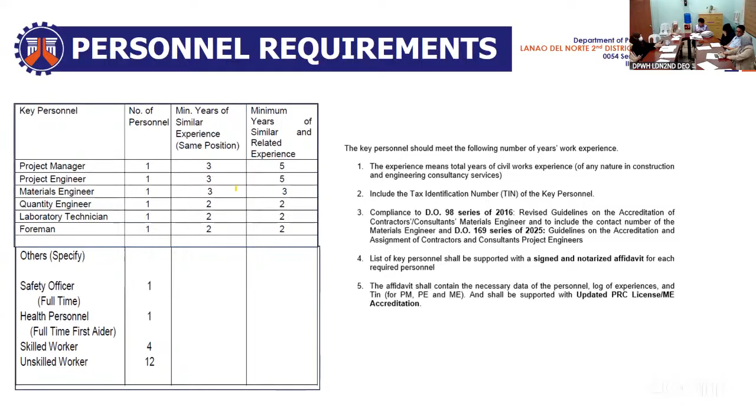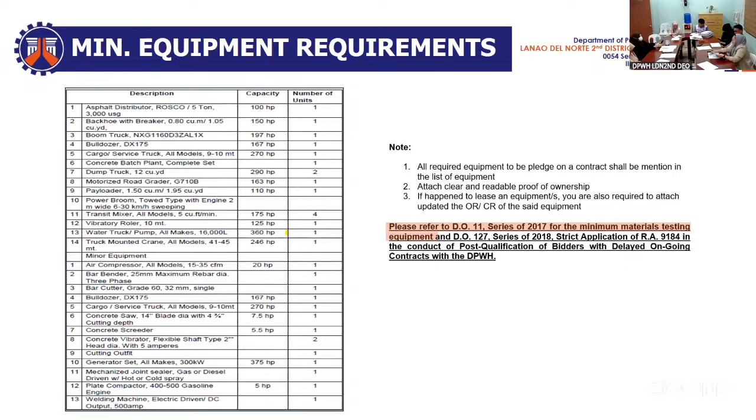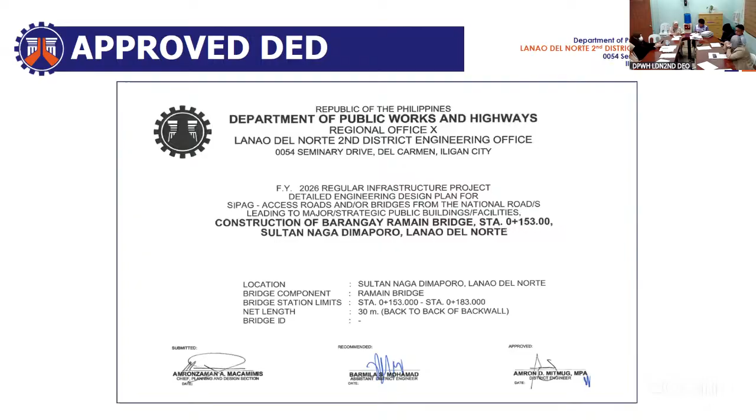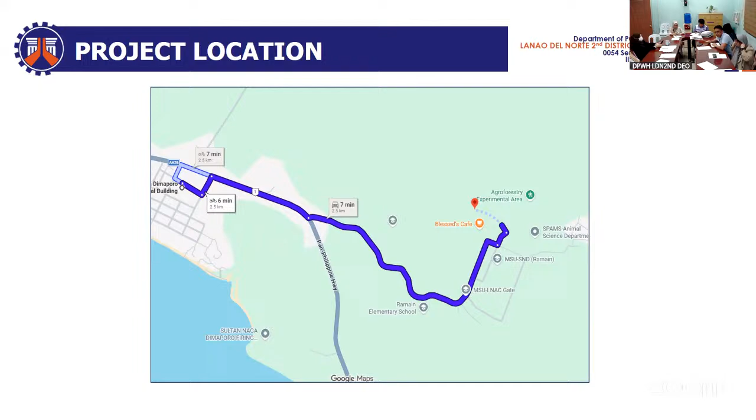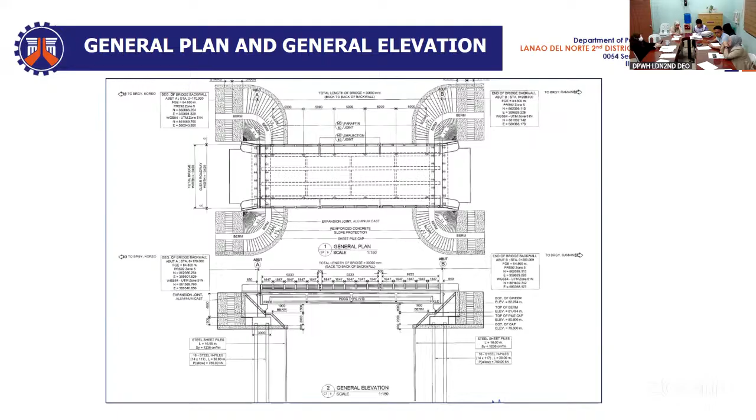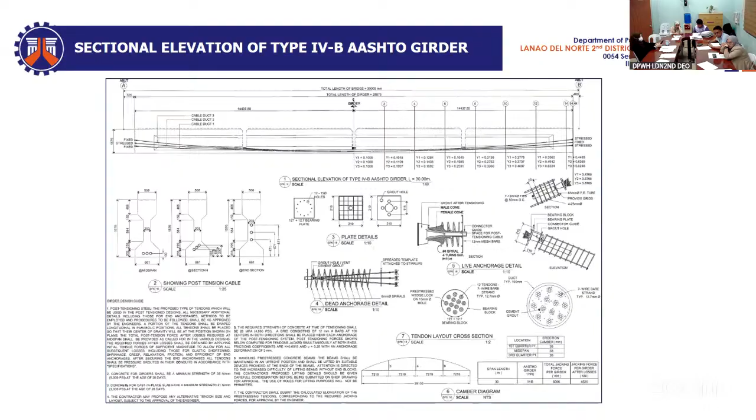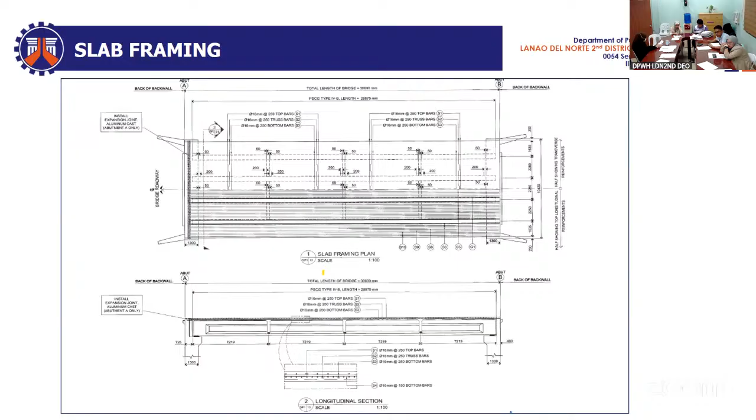Shown also is the general plan and general elevation, the sectional elevation of type IV-B AASHTO girder, the abutment details, slab framing, the foundation plan, and the slope protection details.

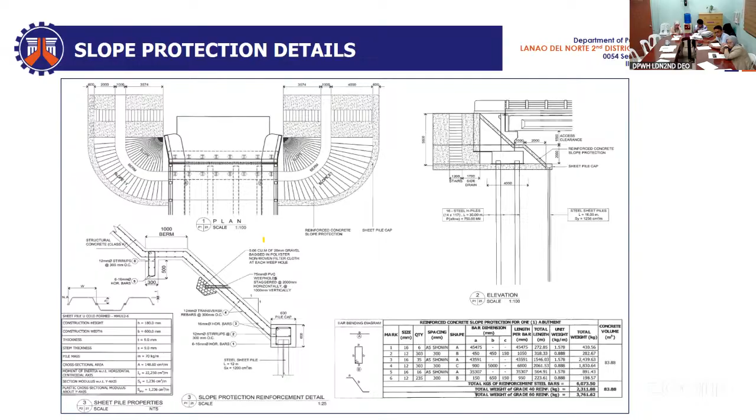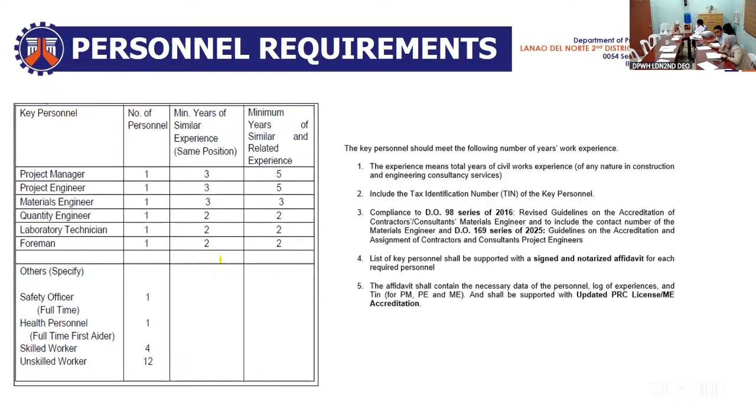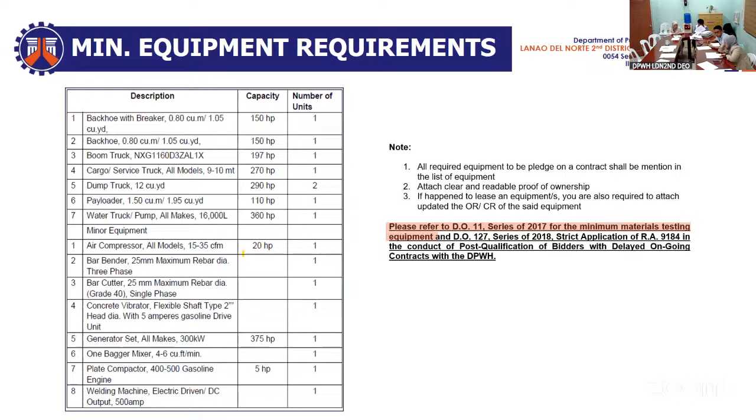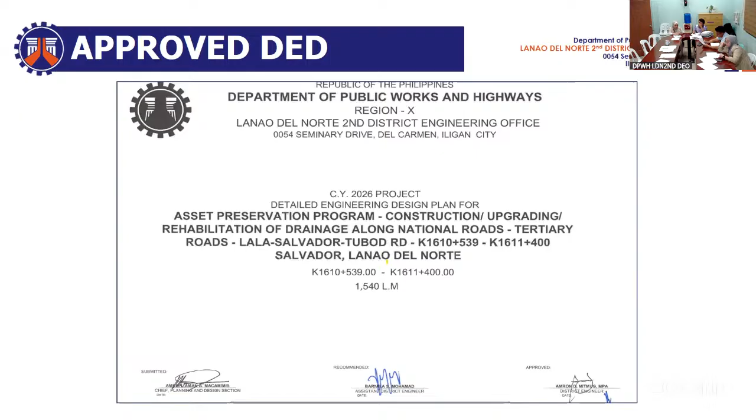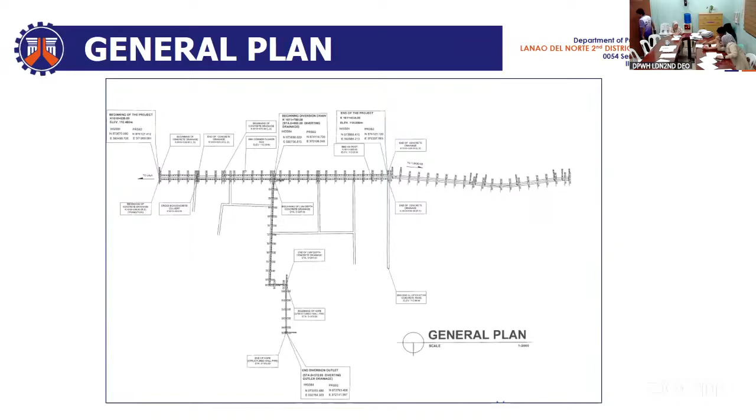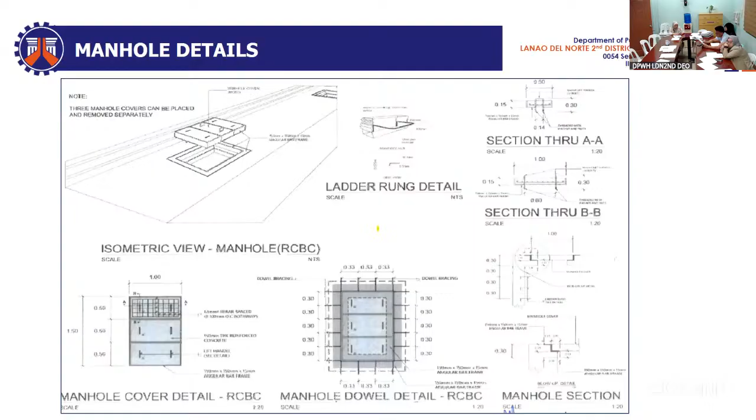Shown also is the bill of quantities of the project, the general plan, the line canal details, the manhole details, and the drainage steel grating details.

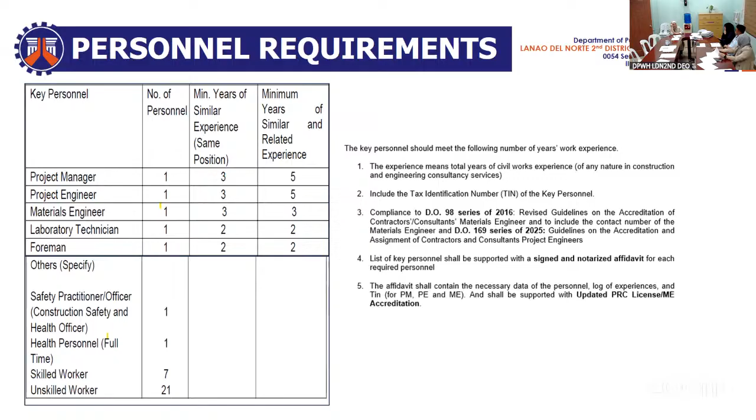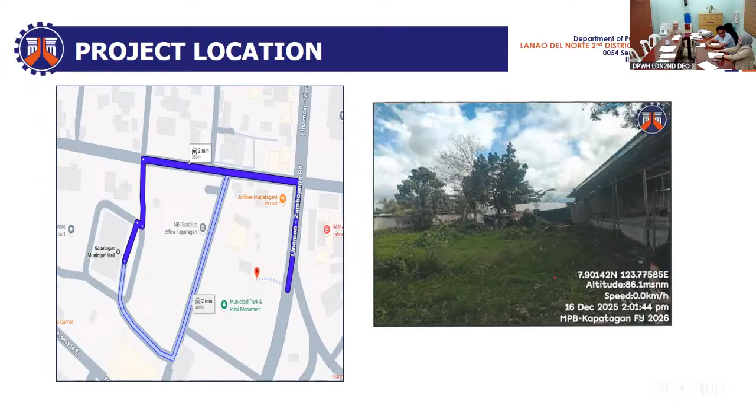Shown is the project location, which is from Kapatagan Municipal Hall. It would take a 2-minute ride from the site, which is approximately 400 meters. Shown also is the bill of quantities of the project.

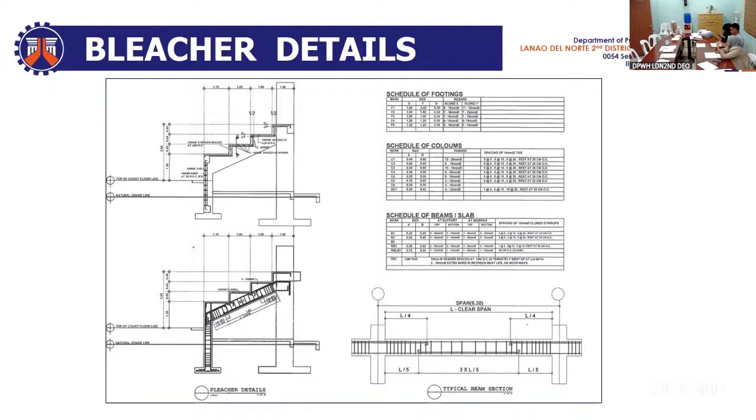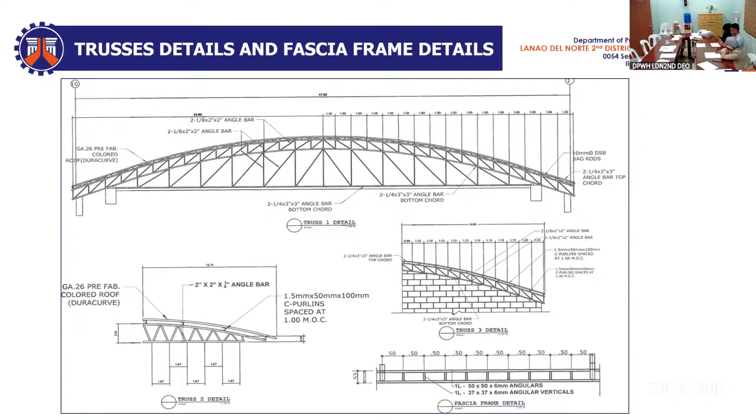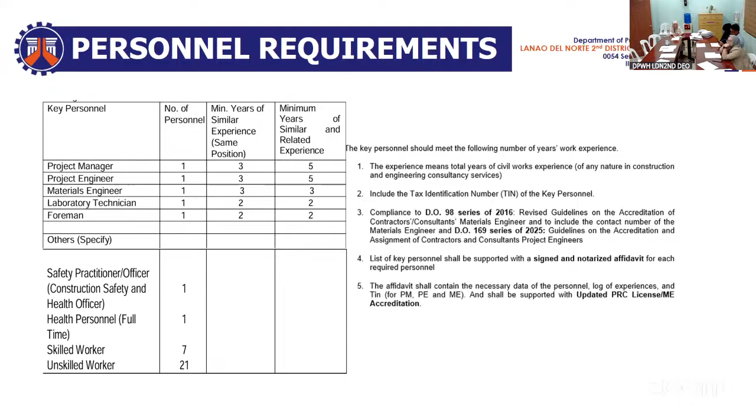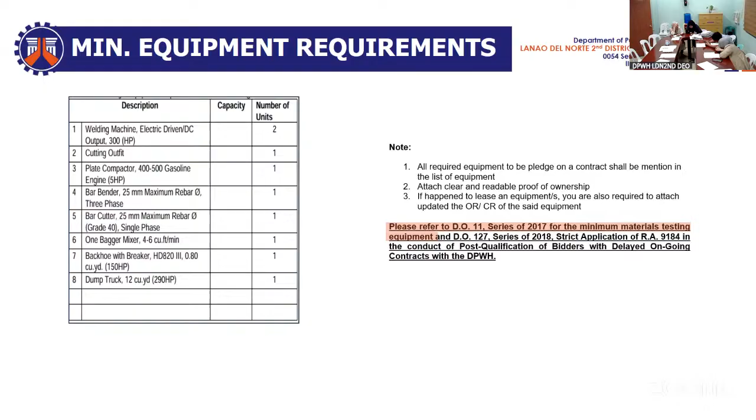On the other hand, for the minimum equipment required, these are the minimum equipments required to complete the project. And as per the readiness of the contract, shown are the approved detailed engineering design plan.

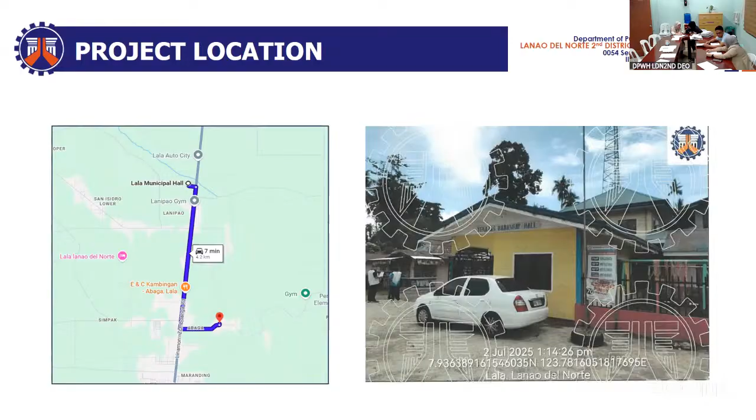Shown also is the project location, which is from Lala Municipal Hall. It would take a 7-minute ride from the site, which is approximately 4.2 kilometers. Shown also is the bill of quantities of the project, the perspective view, the elevation details.

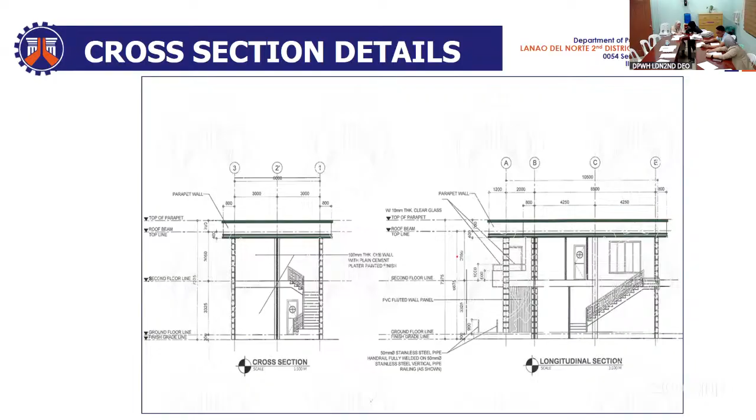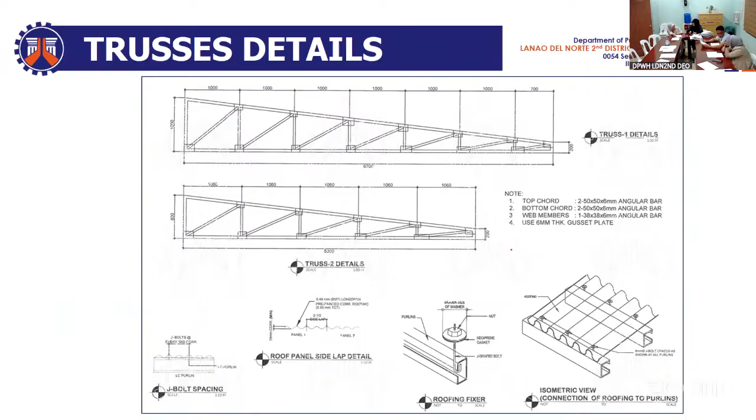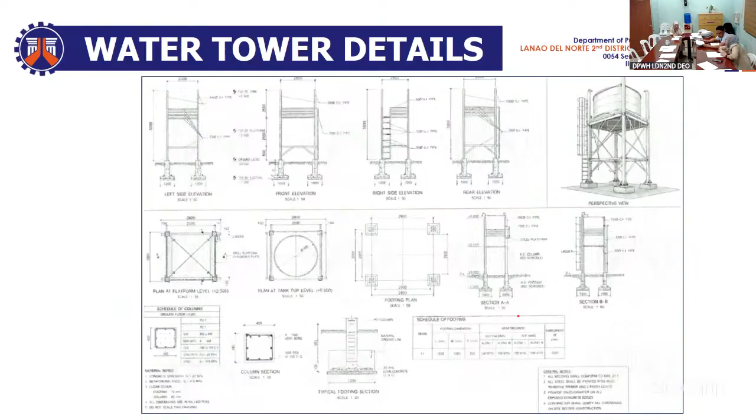The cross-section details, ceiling plan, footing details, the floor plan, trusses details, the stairs details, ramp details, water tower details, signage details, the plumbing and septic tank details, and the lighting layout.

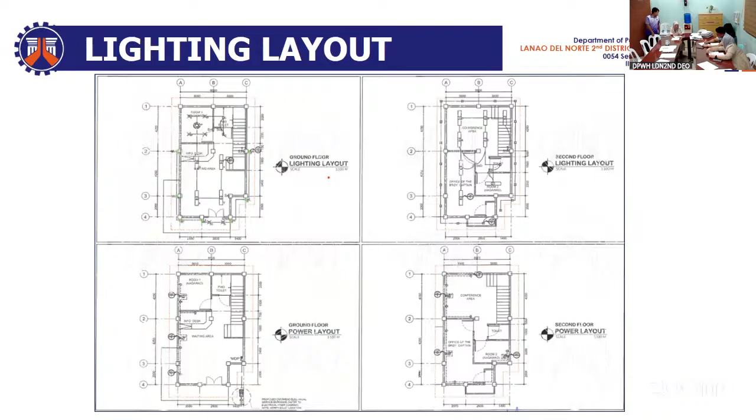As per DO series DO 82 series of 2025, which supersedes the Department Order number 11 series of 2022 and Department Order number 21 series of 2017, and shall take effect immediately.

Installation location for building projects: the billboard shall be installed at the front of the project site. For road, bridge, or flood control projects, billboards shall be strategically installed in conspicuous locations at both ends of the projects.

For road projects exceeding 10 kilometers, additional billboards shall be installed at every 5-kilometer interval. If the project length extends beyond the last multiple of 5 kilometers by up to 2 kilometers, a single billboard installed at the project endpoint shall suffice for both the final interval and the endpoint.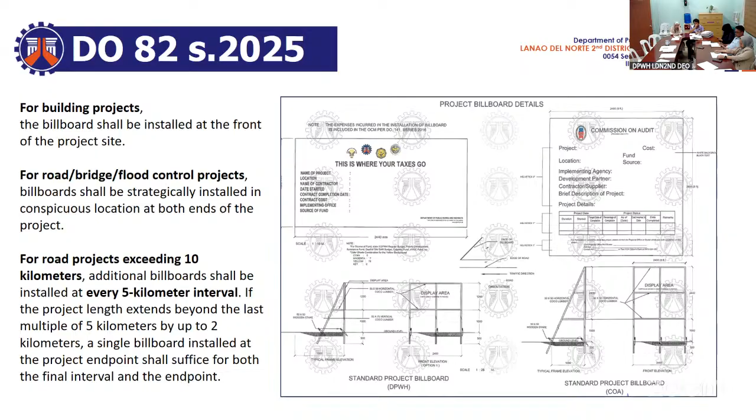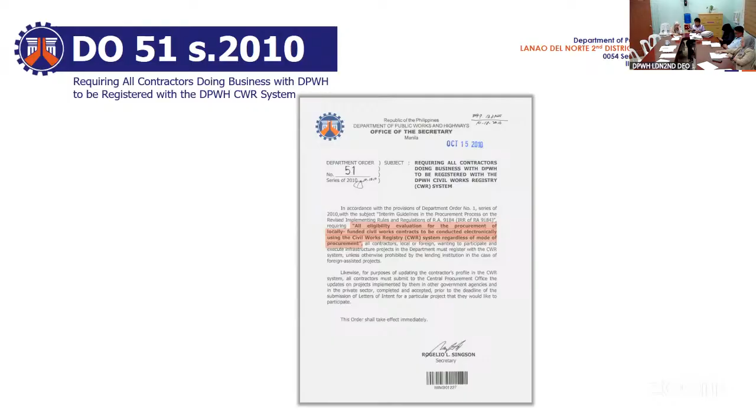We require all contractors doing business in our department to be registered with the DPWH CWR system as per Department Order number 51, series of 2010. Always monitor and update your documents. Expired CPA files will affect your eligibility results. Make it a habit to attach your Class A and Class B documents for your advantage.

Bid submission may be done manually or electronically. However, bidders should only select one mode of submission. You may be allowed to submit its eligibility requirements electronically with certification under oath as to the correctness of the statements made and completeness and authenticity of documents submitted. Link for online submission is as shown.

Submission and receipt of bids. Bidders shall submit their bids through their respective duly authorized representatives using the form specified in the bid docs, in two separate sealed bid envelopes which shall be submitted simultaneously. The first shall contain the technical component of the bid, including the eligibility requirements under Section 52 of the IRR, and the second shall contain the financial component of the bid.

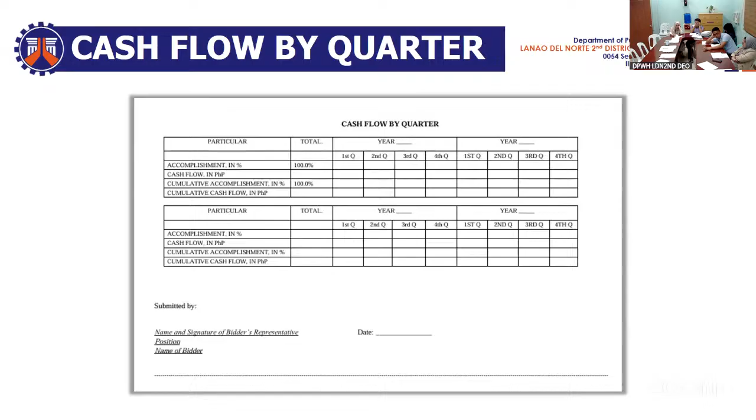These are the forms attached in our bid docs: the bid form, the cash flow by quarter, and the bid securing declaration.

Under Rule 7, Section 56 and 57 of Republic Act 12009, bid and bid security validity period is 120 calendar days from the date of the opening of bids. Should it become necessary to extend the validity of the bids and its securities, the procuring entity shall request in writing all those who submitted bids for such extension before the expiration date therefor.

Shown is the form for the organizational chart, the list of personnel, the list of equipment, the omnibus sworn statement items 1 to 11, and the sworn affidavit of eligibility and beneficial ownership.

We will be using LCRB for this procurement process as mentioned in Section 58 of the said Republic Act. The BAC shall check the submitted documents of each bidder against the checklist of required documents to ascertain if they are all present, using a non-discretionary pass or fail criterion as stated in the instruction to bidders.

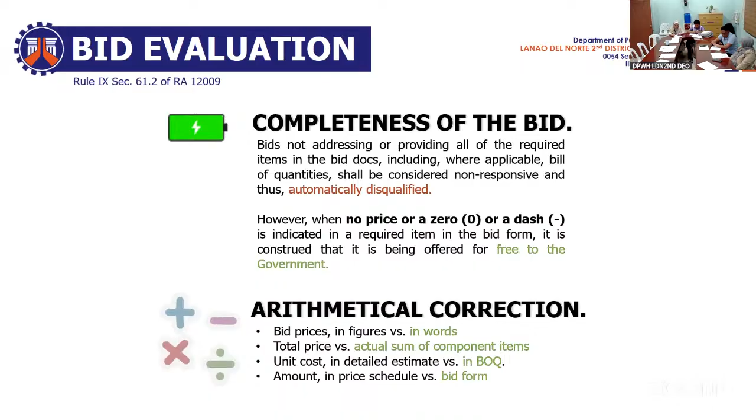For post-qualification, within 5 calendar days from receipt by the bidder of the notice from the BAC that the bidder has the LCB, the bidder shall submit all eligibility requirements supporting its PhilGEPS certificate of registration, its latest income and business tax returns filed for the preceding quarter, which should not be earlier than 2 quarters from the date of submission and receipt of bid, and other appropriate licenses and permits required by law and stated in the bidding documents, like tax clearance, Mayor's permit, DTI, or SEC.

Further, prospective bidders should not be included on the blacklisted contractors list of GPPB.

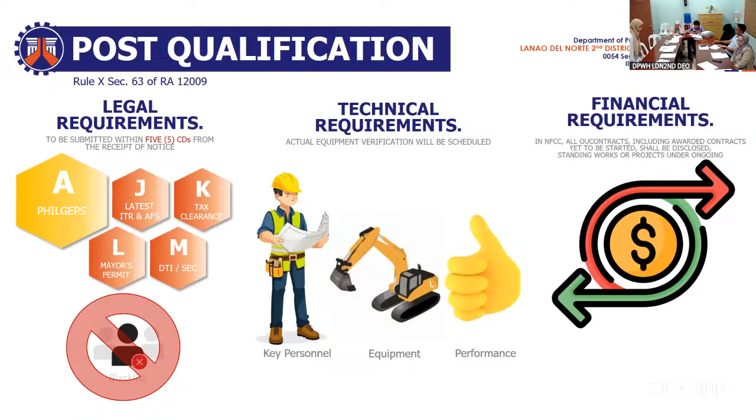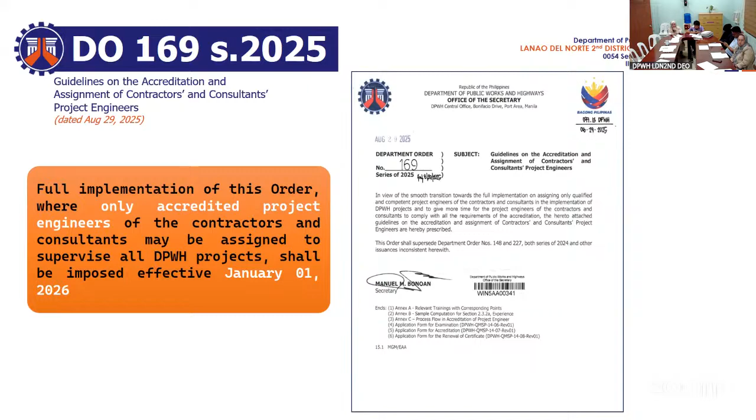These are the published department orders on accreditation of the DPWH contractors and consultants, project engineers, provisional project engineers, and testimonial PEs. Please do check if your PEs are on the list, to avoid violation of the 3-strike policy.

Those contractors who plan to apply for accreditation for their personnel, kindly refer to Department Order number 169, series of 2025, guidelines on the accreditation and assignment of contractors and consultants, project engineers. Also shown are the minimum material testing equipment for medium contractors as per Department Order number 11, series of 2017.

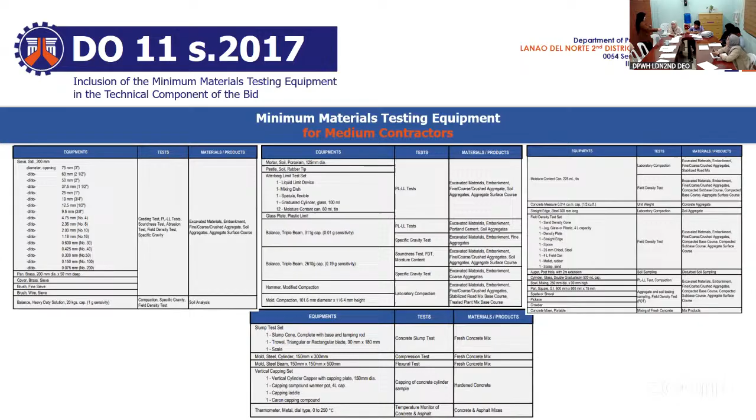Pursuant to item 34.3B2 of the 2016 revised IRR of Republic Act 9184, and to ensure that all DPWH projects are completed without delay, all BAC are hereby directed to strictly apply, among others, during the conduct of post-qualification or award of contract, the following guidelines.

During post-qualification, the BAC shall determine the bidder's compliance through declared SLCC, competence and experience of the bidder's key personnel, availability and commitment, and/or inspection and testing for the required capacities and operating conditions of major equipment units, performance of the bidder in its ongoing government and private contracts, and results of the CPES. If the BAC verifies any of these deficiencies to be due to the contractor's fault or negligence, the agency shall disqualify the contractor from the award for the procurement of infrastructure projects.

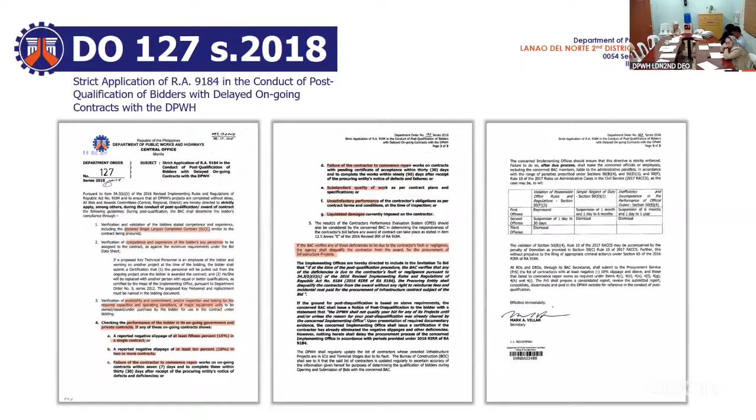The performance security shall be in an amount not less than the required percentage of the total contract price in accordance with the following schedule: first form is cash or cashier's/manager's check issued by a universal bank, which is 10% of the contract price; second form is a bank draft, guarantee, or irrevocable letter of credit, which is 10% of the contract price; and the last form is a surety bond, with a minimum of 30% of the contract price.

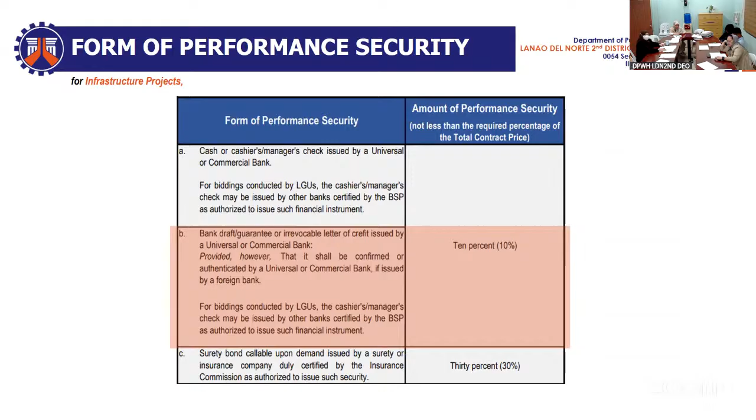The performance security shall remain valid until issuance by the procuring entity of the certificate of final acceptance. That would be all for the awarding of contract.

Okay, thank you. All contract data, eligibility requirements, technical and financial components, including award, have all been discussed. The pre-bid conference is now open for questions and clarifications from the participating bidders.